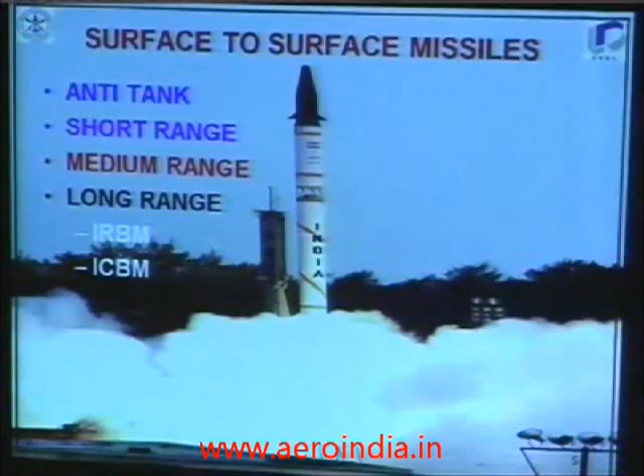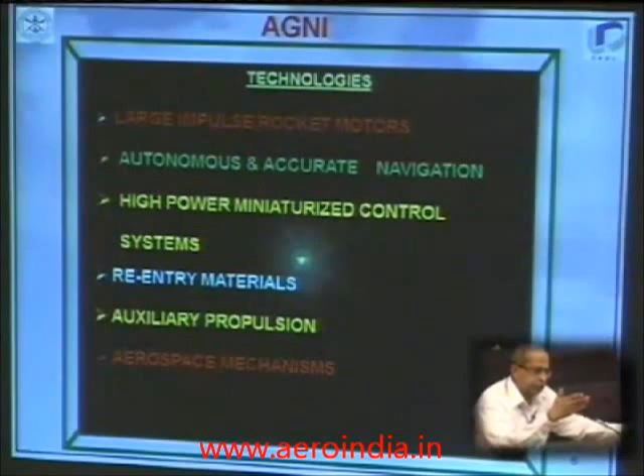Then you have the long range versions, the IRBMs, the ICBMs. I spent a little more time on this Agni missile, some of the strategic systems. The basic technologies and what it is you need to make: though all the missiles belong to the same family, each has its own very key signature in terms of technologies, materials, and avionics. If you look at Agni, you need very large impulse rocket motors, navigation, then very high-powered control systems, miniaturized, and most important, as he was mentioning earlier, supersonic cruise, supersonic combustion propulsion. The challenge today is the kind of materials you've got to have which will sustain that kind of temperature for so long.

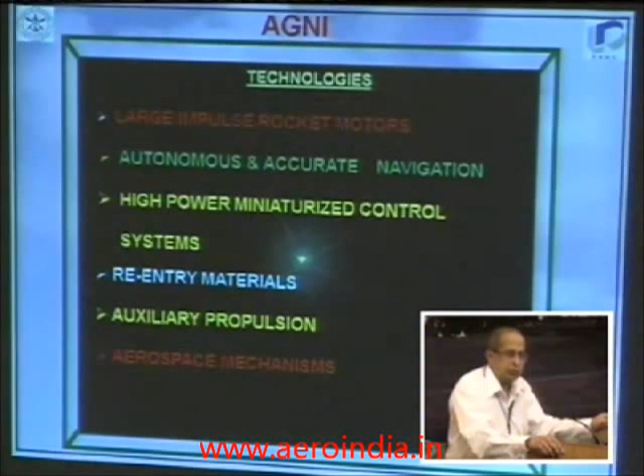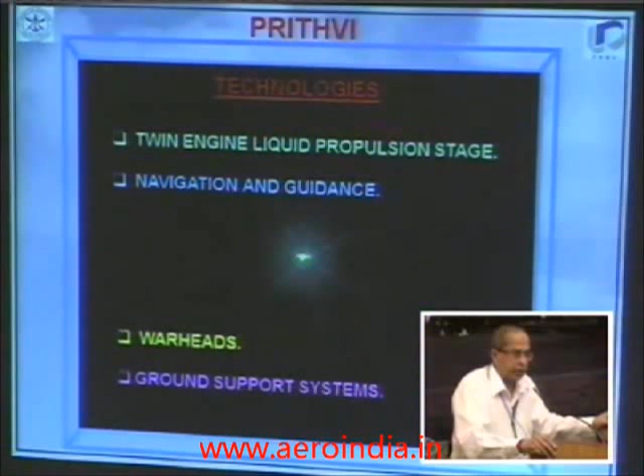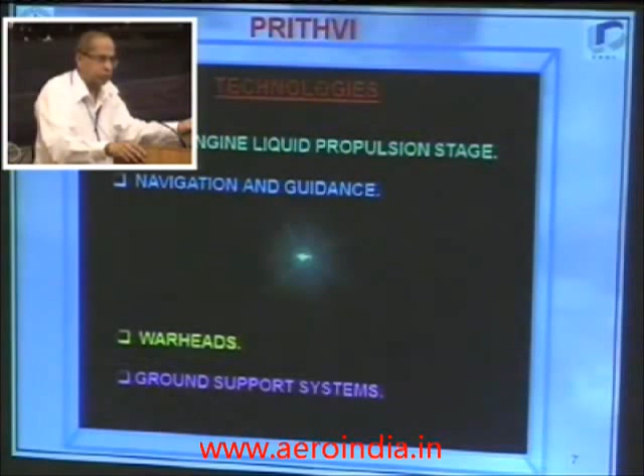And then you have auxiliary propulsion, thrust vectoring, and so on, reaction control systems, and then aerospace mechanisms, stage separation, and so on. I won't show a slide of this. You must have seen this several times earlier. Prithvi, of which General Sundaram himself has been a project director. It's based on a twin-engine liquid propulsion system, and then very accurate navigation and guidance, and the kind of warheads. And in today's deployment scenario, more than the missile, what's important is the ground support system. Making a missile is not all that tough, but making a weapon system with the ground system or the platforms today is a real challenge.

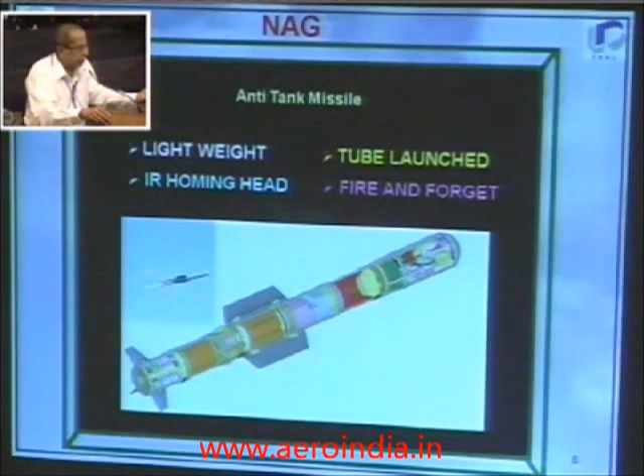Similarly, the anti-tank missile, Nag. A little while ago, if you were here, around 12 o'clock, my colleague Varaprasad was talking about the Nag on the helicopter, which is called the Helina. Lightweight, tube launched, and you have an infrared imaging seeker head and fire and forget capabilities. This is totally indigenously made and has been successfully tested. Let me see if I can show you a video of this.

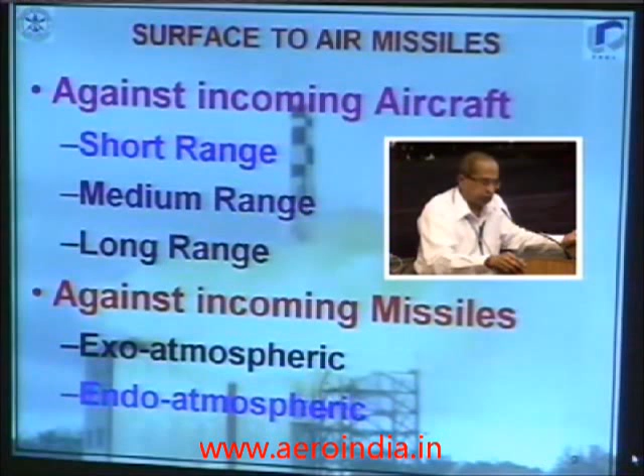And then coming to surface to air missiles. Mostly they are used against incoming fighter aircraft; they can be used against incoming missiles also. Broadly these days we call it air defense, both exo-atmospheric as well as endo-atmospheric, which our SA himself has been pushing very hard. This is one of the success stories of the indigenous program. This we have gone way ahead.

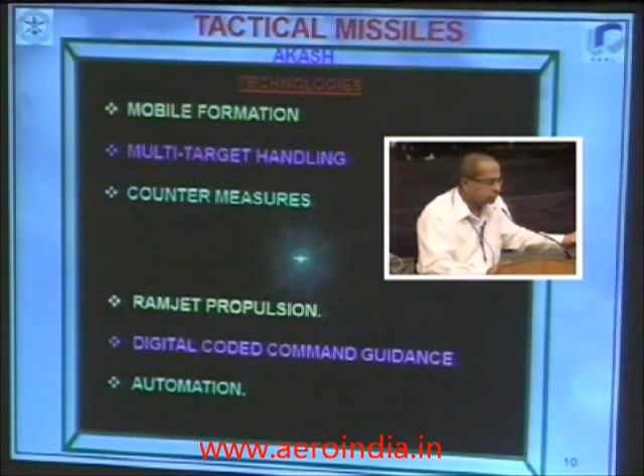Then comes Akash, which is now going into production, large numbers, thousands. And here the trick is mobile formation, the weaponization, and the ground control systems, multi-target handling as a missile, and state-of-the-art countermeasures. Another important area is the ramjet propulsion. That is where it has taken considerable time in integrating; it's actually an integrated ram rocket. And then you have digital coded command guidance. You have a ground-based radar that steers the missile towards the target. And then of course automation. These are the things. Just one or two animations. I thought I'll show you one video.

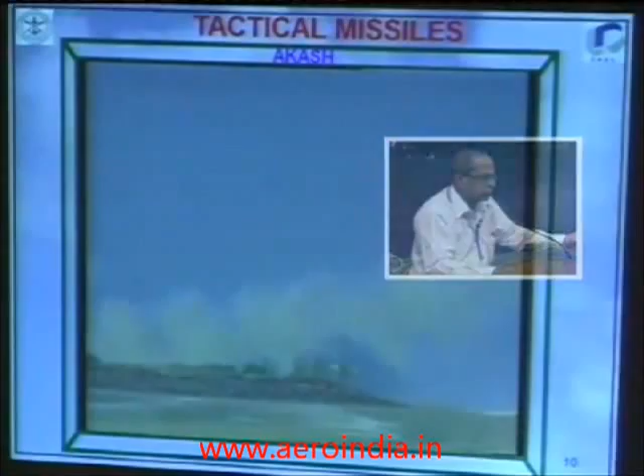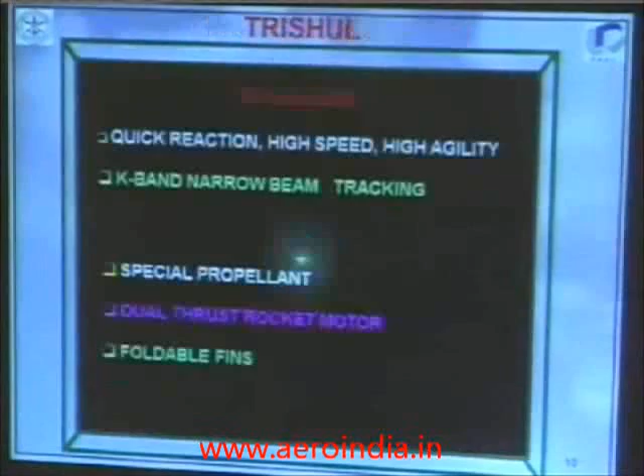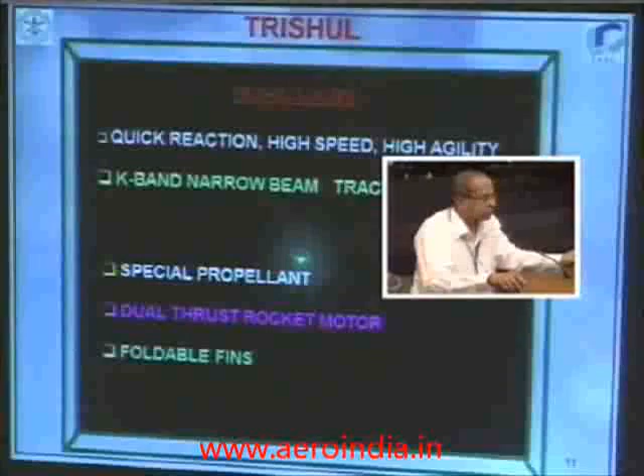It's a so-called QRM, quick reaction, high speed, high agility missile. And we have got a K-band narrow beam tracking system. And we have used a very special propellant in this and a dual thrust solid rocket motor. That is, you have the booster fired for some time and then you have the sustainer taking it along,

and then fins are foldable. So this is also a very important system which we developed, though it could not enter the production. This is air-to-air missile scenario, animation. All it needs to make this kind of system.

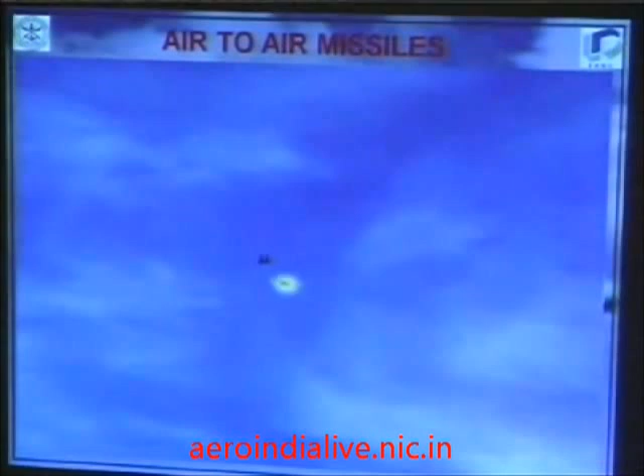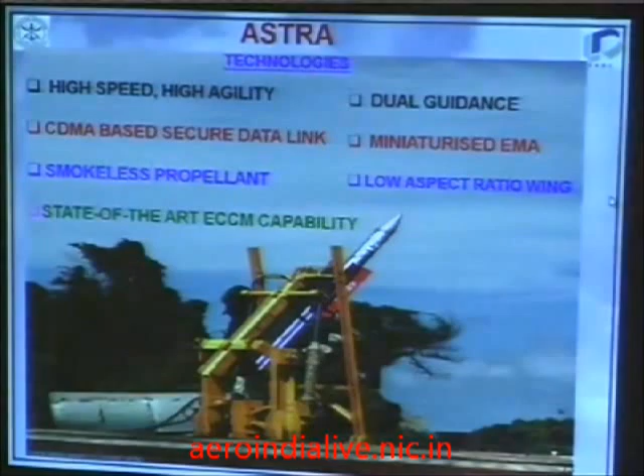To make this missile, what all you need is you need a very high speed, high agility system. Then you have got a secure data link. The mother aircraft radar looks at the target. The information is passed on to the missile through a secure data link.

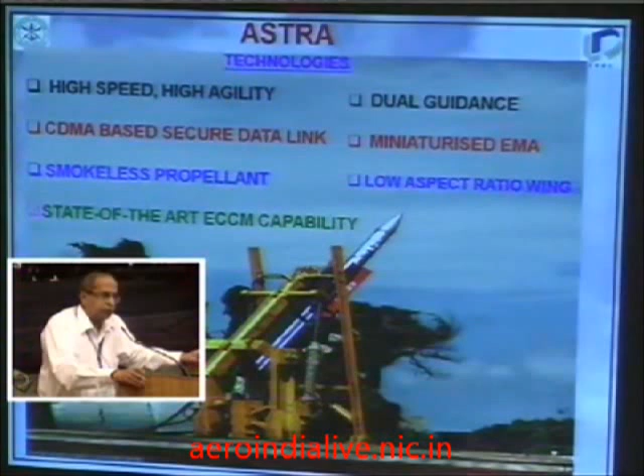Then you have dual mode guidance. That is, in the mid-course phase you have the inertial navigation. In the end phase you have got the terminal guidance using either an active radar today, of course, or using a dual mode radar. The name of the game today is all miniaturized systems. Even the electromechanical actuators which are used for moving the fins, they are all miniaturized. The wings are all low aspect ratio wings.

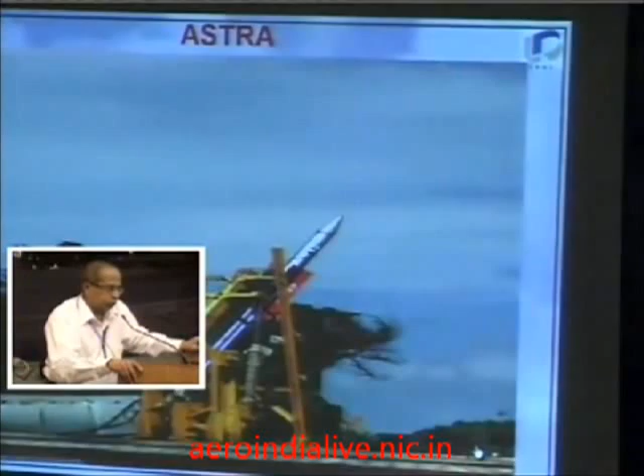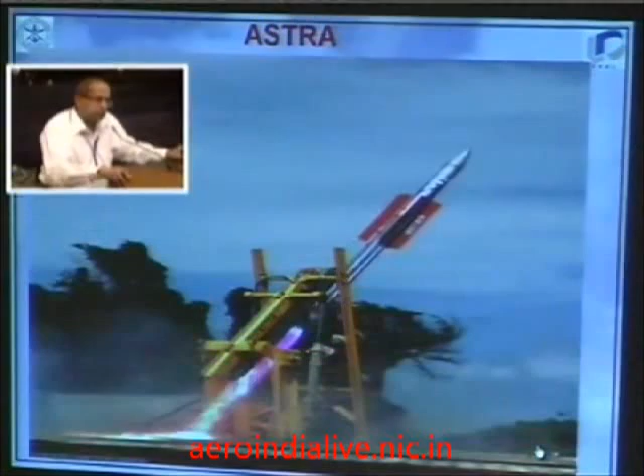So this is one of the flight trials, high speed movie camera we are showing you, just to show the kind of propulsion system which we have taken considerable time, because the Air Force asked for a smokeless propulsion system. Initially we had problems of combustion instability, so we had to do a lot of experiments, try with a lot of additives and other inert elements to make it totally smoke free.

Then you have, in the category of air to surface missiles, you have against ground targets, against ships. These are the kind of systems we are trying to work. Then you have underwater and ship-launched missiles. Currently programs are on in DRDO. We also are making submarine-launched systems, both against strategic targets as well as ships, plus systems launched from the ship, like Dhanush, for example, against strategic as well as air targets.

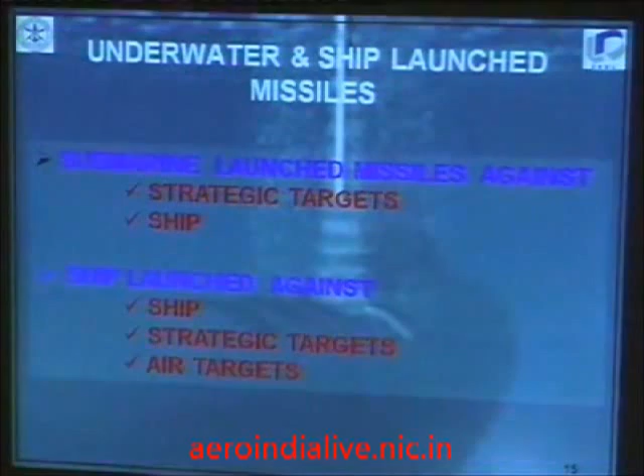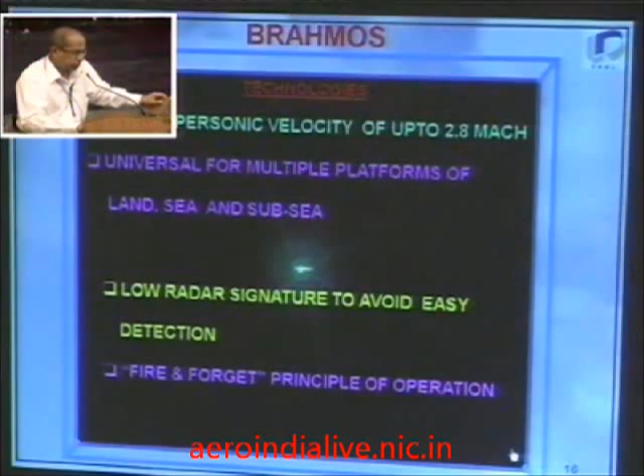Now, of course, a lot has been said and a lot has been seen about BrahMos. I will not spend too much time, except that I will show one video for those who have not seen. Supersonic cruise missile based on adapted technology using kerosene. Trajectory normal. It's a joint venture between India and Russia. It's a success story. Then you have the ship-launched version of same Prithvi variant.

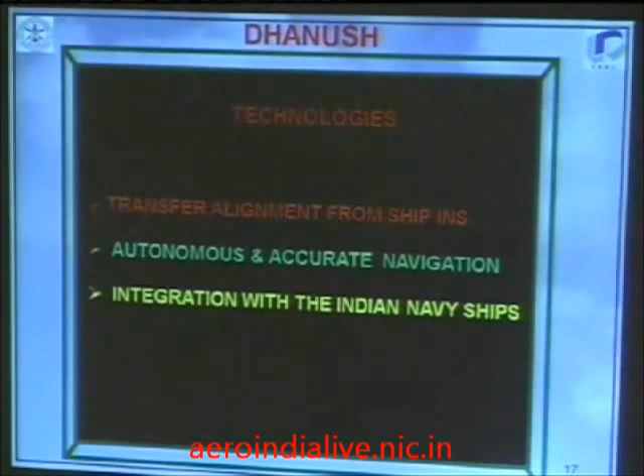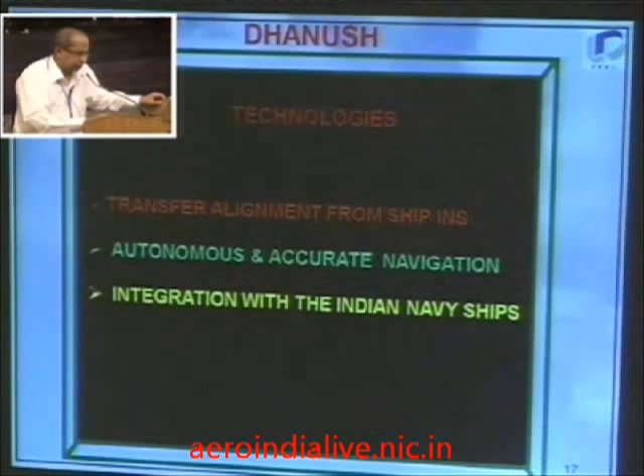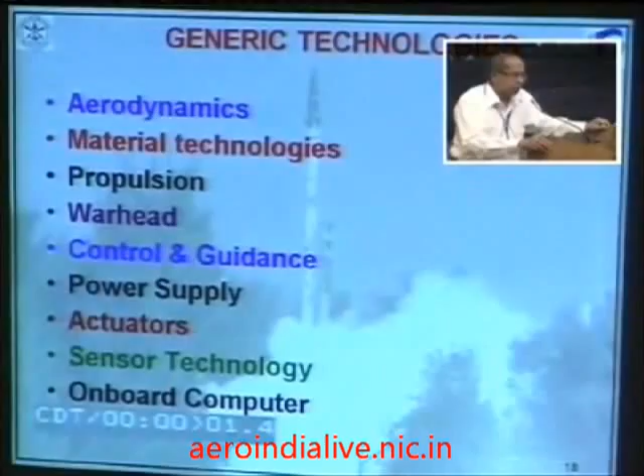Here the technology is accurate transfer alignment and then autonomous and accurate navigation and integration with several of Indian naval ships. Now I dwell some time on what are the kind of generic technologies you need to make this kind of weapons. One is aerodynamics. Today's aerodynamics, if you look at tactical missiles, it is quite different from what you read in the books, especially when you go down to very small missiles with low diameter, low moment of inertia.

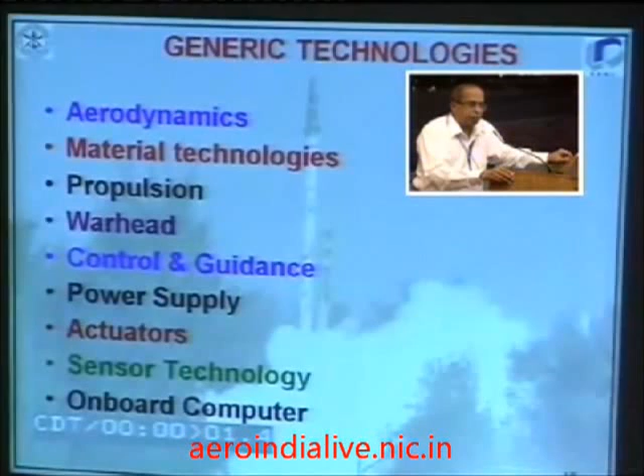It becomes a very highly complex aerodynamics, especially at high angles of attack. And the cross coupling between the pitch motion, the yaw motion, it's very difficult to figure out. You've got to do a lot of experimental work, CFD, flight testing, wind tunnel testing. And even then sometimes you find it extremely difficult to reconcile. And then material technologies, high specific strength. And then propulsion, of course you have got various propulsion systems today. We have ramjet, scramjet.

And then different types of warhead. I will not spend too much time on, there are so many varieties of warhead. It is target specific. And then control and guidance, the sensor, and the kind of accuracies you look for, whether you want to make a missile or eventually want to make a hittile. A hittile which has almost zero miss distance, we call it hittile, so that you can reduce your warhead requirements and increase the effectiveness. And then the thermal batteries, the lithium ion batteries, the varieties of batteries which we develop for power supplies.

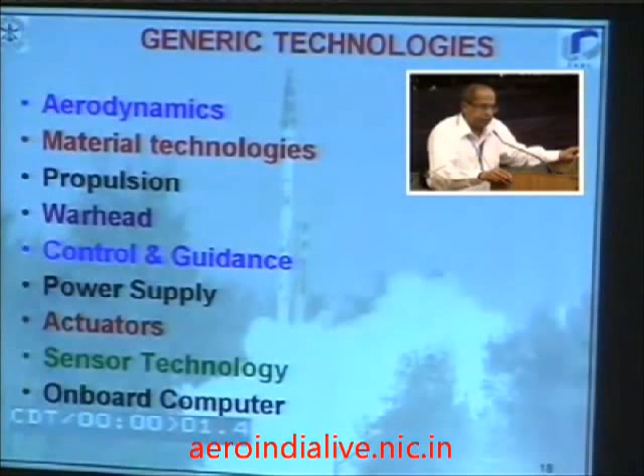So they are getting more and more miniaturized by the day. And the kind of energy density you get, V into I into T, it's amazingly large for its size and weight. And then of course actuators, they are also becoming smaller and smaller. We had earlier hydraulic, pneumatic, now you go down to electromechanical. Even these are becoming smaller by the day with new materials and powerful permanent magnets.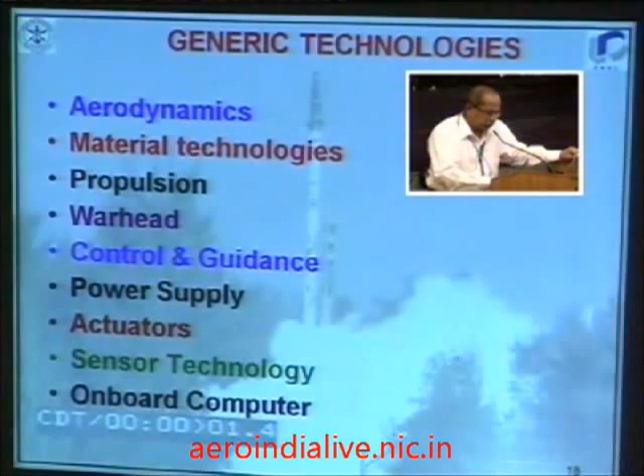That's our goal. These are all the generic technologies I have slightly modified from, as I said right in the beginning, the Fleeman book. There are so many iterations and so many lessons we have learned. So we have modified all these basic elements, the technology elements.

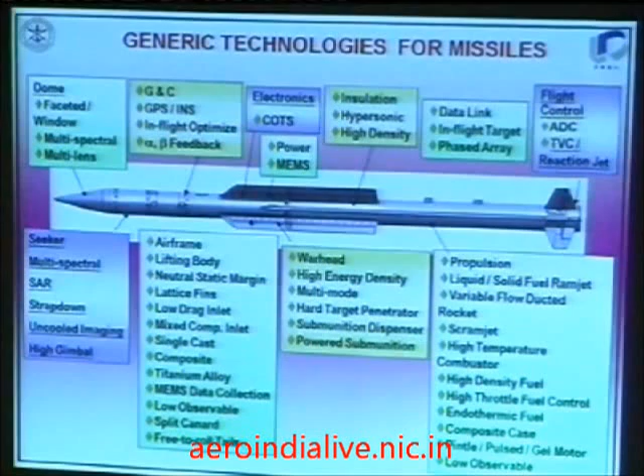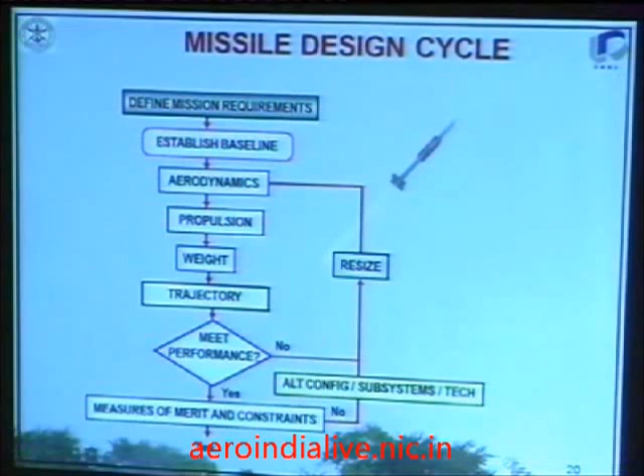Then this is the kind of design cycle we go through. From the ASR, we arrive at the mission, then we establish the baseline, then we look at the aerodynamics, propulsion, weight, trajectory. Then you find that somewhere something is not okay, then you change over. In our case, for example, when we put the actuators in the missile, we found that the length had to increase. The moment the length increased, to accommodate these actuators, a local diameter had to be increased. Then the drag increased, the propulsion was not adequate, the T minus D was not okay. So it goes into an iterative cycle by the time you freeze your design.

It takes considerable time. By the time you freeze that, someone will suddenly say, why don't you change over from aluminum alloy to titanium? This is much better. The moment you change to titanium, you have some other difficulties, and the rocket motor remains in maraging steel, other elements are in some other material. So you have got stress corrosion and dissimilar materials. All kinds of problems you get into. Then you have thermal problems, because these missiles go up to as high as Mach 5, Mach 5.5. So you have to take care of all these things.

So suddenly down the line, say after 4 or 5 years, you encounter new problems. That's how the cycle time sometimes becomes longer. But in the end, if we decide that we do not do too much experimentation, you get a product in a cycle time of something like 10 to 12 years.

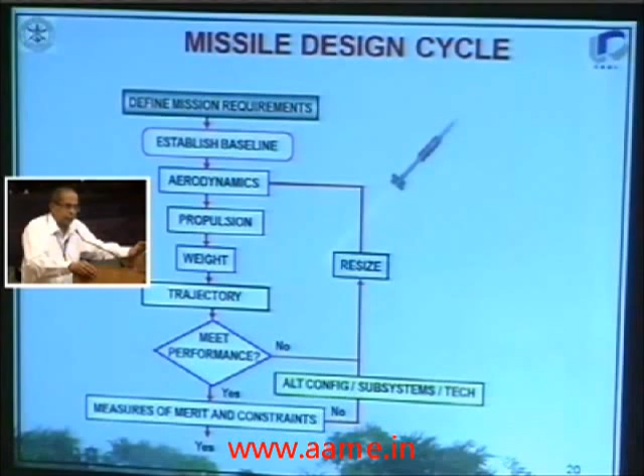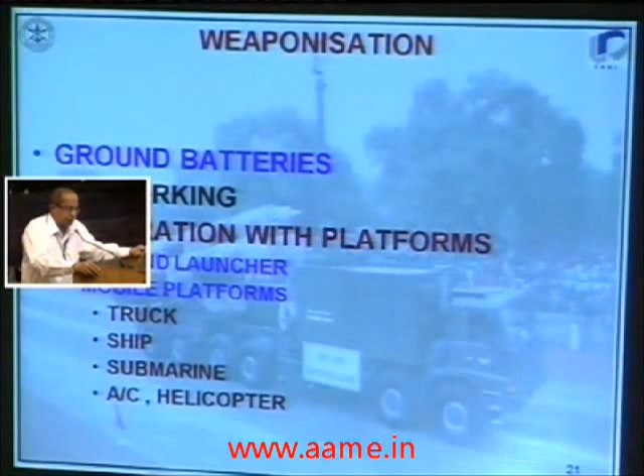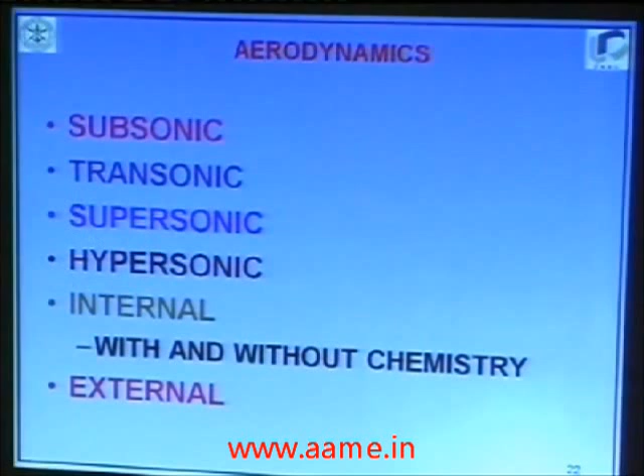Then I come to weaponization. Then you've got ground batteries, you've got networking. The most challenging job, as far as my experience goes, is integration with platforms; it is as tough, if not tougher, than making the missile itself. Integrating with trucks, ships, submarines, aircraft, and helicopters. Then you have issues at various speeds: subsonic, transonic, supersonic, hypersonic, exceeding Mach 5, 5.5. Then you have problems associated with flow, internal flows, chemistry, external flows.

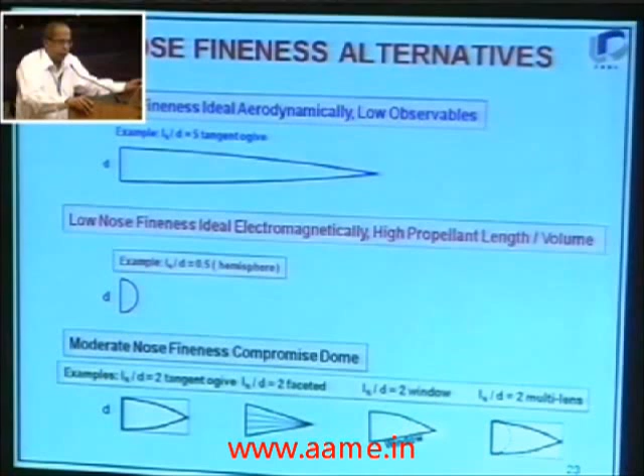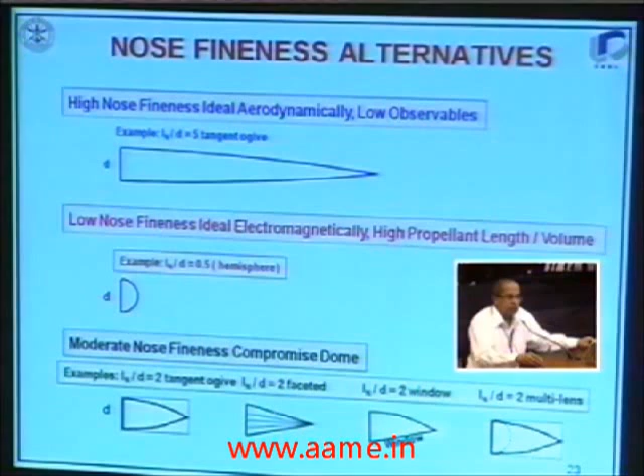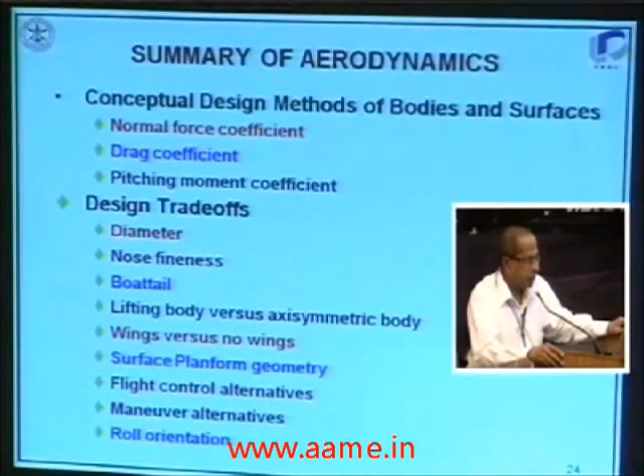And then what kind of shapes do you have to have? Today, for example, the slenderness ratio has touched almost 22, 23; even 24 is not unheard of. In earlier days, the moment you exceeded something like 16 or 18, people were worried about the interaction between aerodynamics and control, because there was flexibility. Today you've got powerful notch filters and autopilot design. So we do ground resonance tests and take care of all these. Still, there are limits which you should not exceed. Then you have very complicated approaches, design trade-offs. We take care of all these parameters which I'm showing on the screen.

Then issues like stability and control. These two are by and large contradictory. For example, if you take a missile and if you want to make it very highly agile, you don't want the static margin to move far too much. As you all know, with changing Mach number, the center of pressure keeps traveling. And after the propulsion has burnt out, the CG remains practically the same. So the kind of static margin travel we have creates stability problems.

So the static margin requirements you have at interception, the static margin requirements you need at the time of launch, taken from the safety of the aircraft, all these become a little contradictory. And at times it becomes very difficult to satisfy all the three. So we make trade-off studies and make sure that you decide which is of utmost importance.

Is it important at the time of interception, or do you want excessive stability and safety of the aircraft while you pay a price for agility? So these trade-off studies we make and take decisions. We keep the user in the picture and then take these decisions.

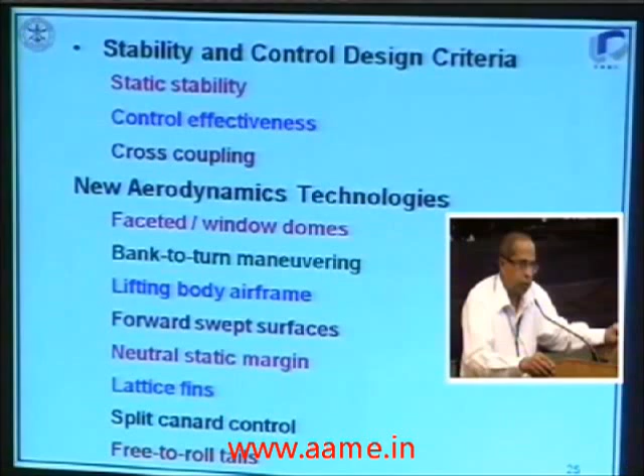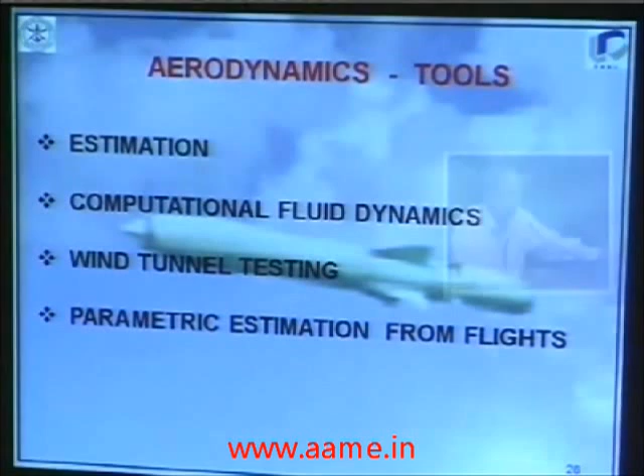Then for aerodynamics also, it's a little complex. At the time of design, you make some estimates, use tools like computational fluid dynamics, and then you would have wind tunnel testing. You always find some difference. And then when you start doing flight testing, probably you touch something like alphas exceeding 15 degrees or 20 degrees, and interception Mach numbers something like 1.4, 1.6, 1.8, or even bordering 2.

For this, you don't have corresponding reliable data coming either from wind tunnel testing or estimates. And often you find that even between CFD and the wind tunnels, as you all know, there's a lot of variance. Then we fall back on the parametric estimates which we do from the flight tests. And then over a period of time, something like 10 or 12 flight trials, only then do you have some reliable aerodynamic data, which is again used for the final design of your configuration.

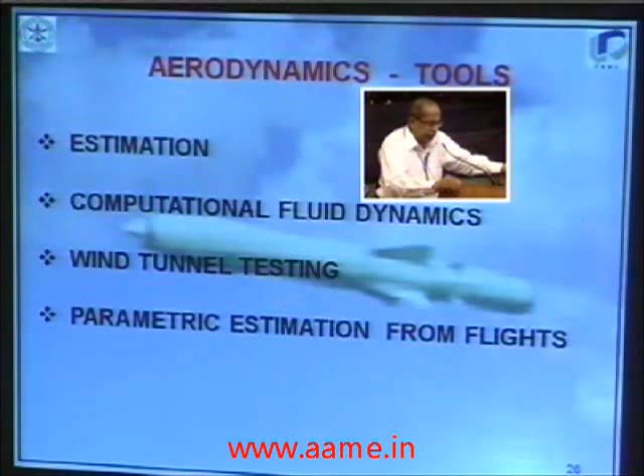Again, when it comes to wind tunnel testing, you have got serious limitations. The type of test sections you can afford to have, the bigger the better, of course. The bigger the costlier also. It goes on like that, Mach numbers, interference. So finally we fall back on parametric estimates. You do limited wind tunnel testing, depend largely on your CFD, take data from the parametric estimates, and finally make a nonlinear estimating model.

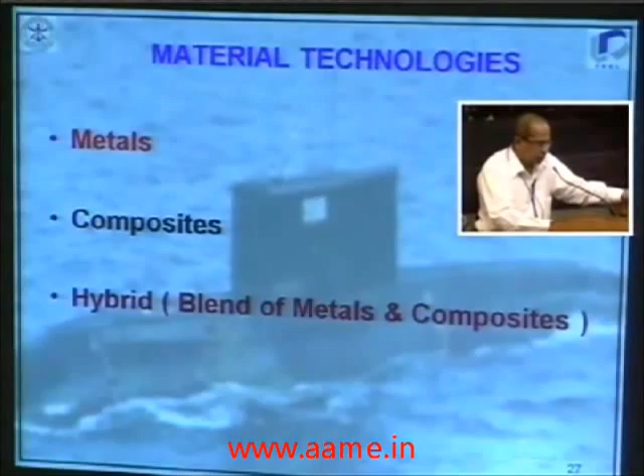Then of course materials. In the fast changing scenario of materials, you have got composites, you have got metals, you have got a combination of both, from structure considerations, strength considerations, thermal considerations, and more important is availability. And cost, of course. Availability, storage, strength, cost, all taken together, you can always work out a table.

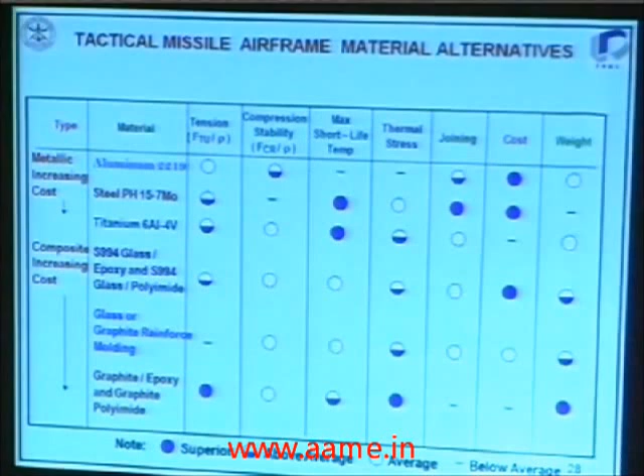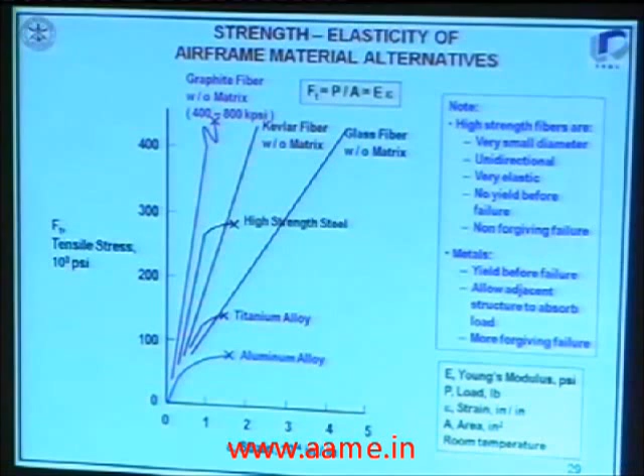We very judiciously choose the material, but spend a lot of time when it comes to testing to meet the requirements of airworthiness. That's a very tall order. And in my program, we have spent a good deal of time in testing alone, all these kinds of steels, aluminum materials, composites, etc.

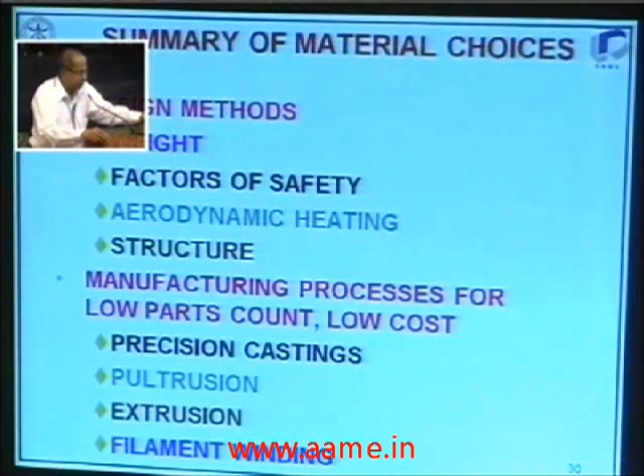Then comes material choices. You have got factors of safety, weight penalties, cost, availability, testing, aerodynamic heating, structure. So all these taken together, by the time you evolve something and start flight testing, the next day you get a new material option available to you.

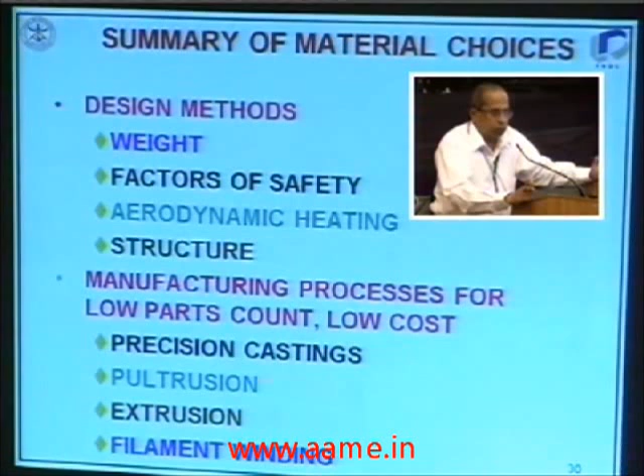But then, if you look at your schedules and costs, somewhere you've got to draw the line and say, well, look, Mark 1 or version 1, this is the kind of performance I can give. In the next version or the next derivative, with better materials, we can give superior performance.

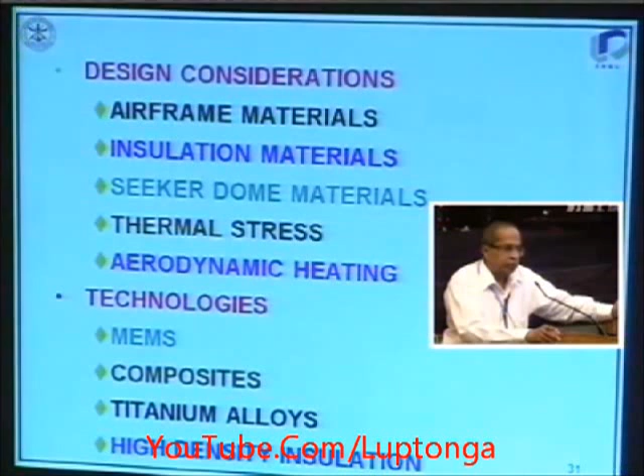Then while you do the design, it becomes a very complex affair if you get into new materials, especially for insulation. Like for rocket motor internal insulation, you have got ablative materials, epoxy materials, EPDM materials which are required for low temperature applications, and then various technology options, MEMS, composites, titanium alloys. All these play a very vital role from the technology level, design level, product level, flight testing, and finally weaponization and handing over to the user. Of course, these are all the propulsion options you consider at the beginning.

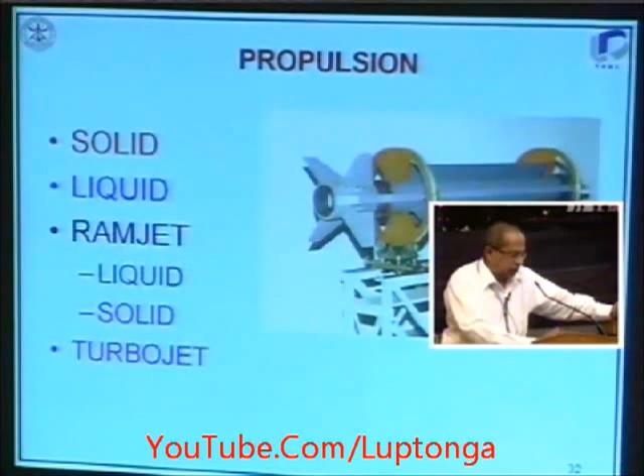Another 5 minutes, please. Okay.

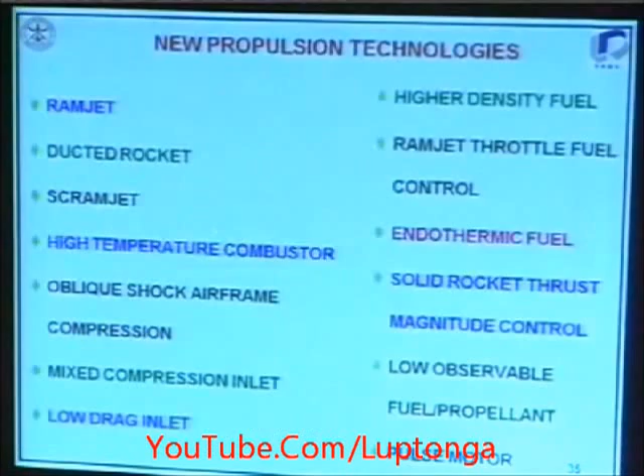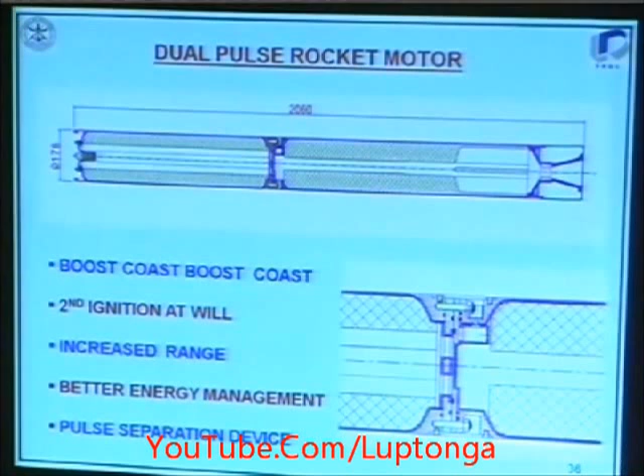Then I'll skip some of these. These are kind of dual pulse rocket motor which we have built for our longer version of Astra, which can go up to 100 kilometers plus. It's a dual pulse rocket motor. You fire the first pulse, do the coasting for a while, and then fire the second pulse depending on the kind of scenario, engagement scenario you have.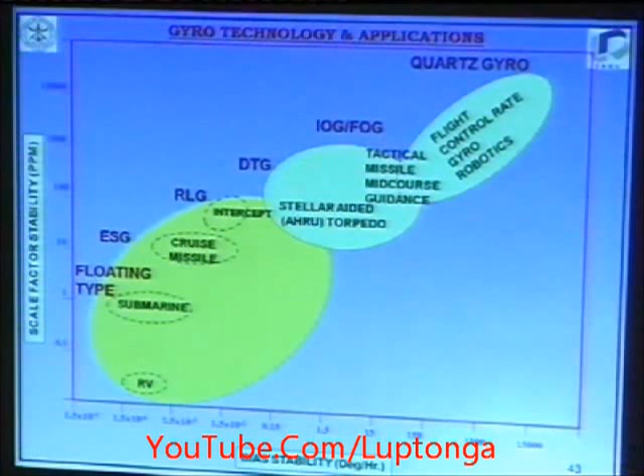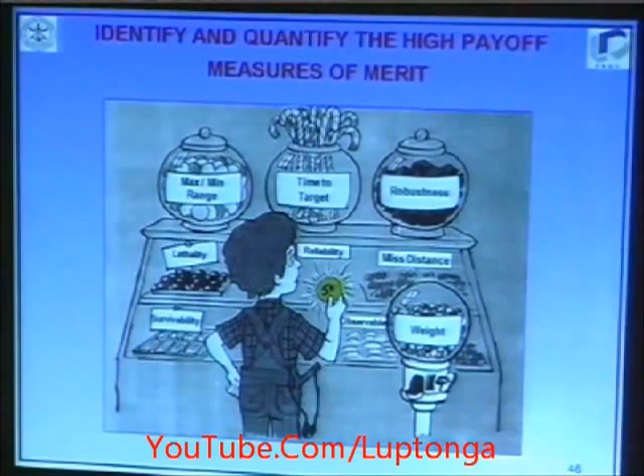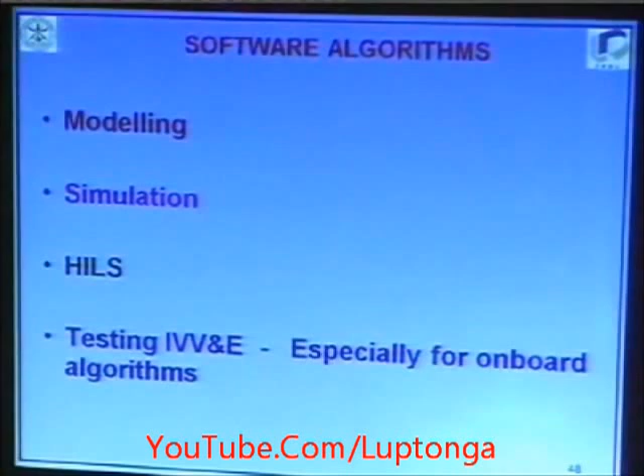And this is how the sensor growth has been over the period of time, starting from going up to fiber optic, quartz gyros, seeker heads, active. Today you have RF, you have got dual mode, onboard computers. Then you make all the trade-offs. And then coming to checkout systems, you have got ground checkout, cockpit display, and then checkout systems for the tank as well. And then various softwares, and then software verifications, modeling, simulation. And we do very exhaustive hardware-in-loop simulation, HILS, and even the software is also thoroughly checked, IV and V.

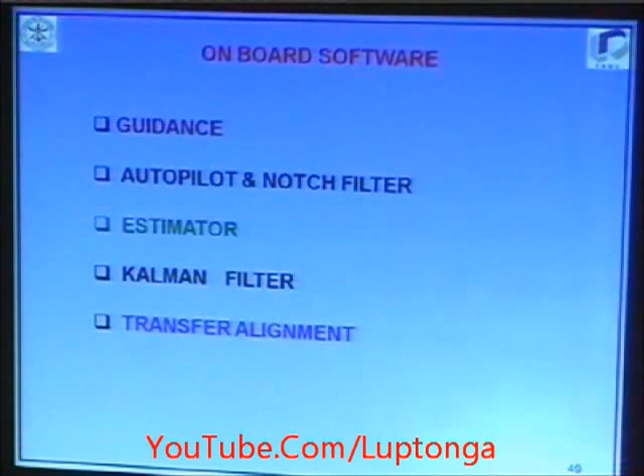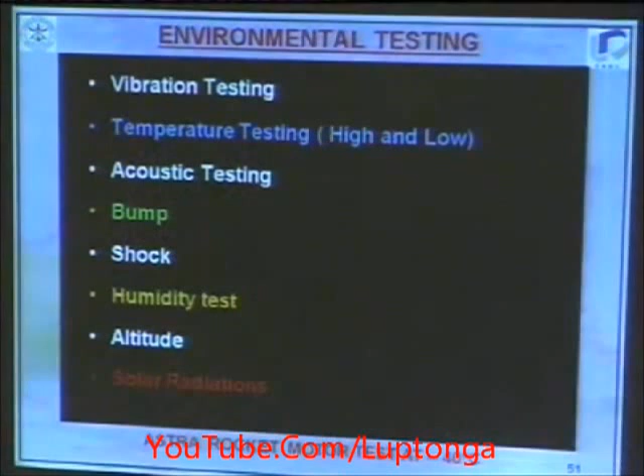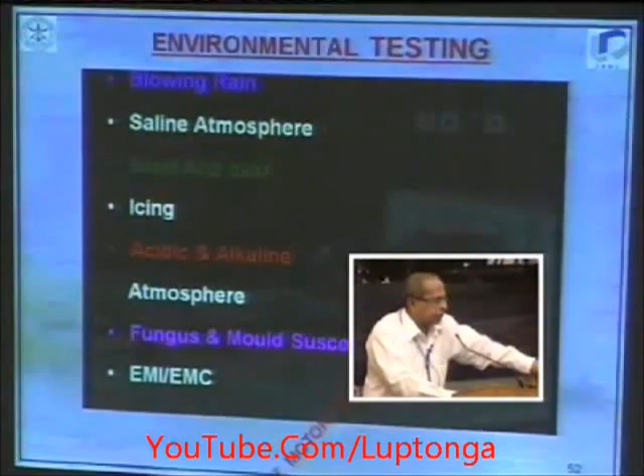And then onboard software, guidance, autopilot, the filter, especially for notching the flex effects, the estimators, the Kalman filters, the transfer alignment between the master INS and the missile INS, and then the integration techniques. Then comes the very time-consuming but absolutely essential part of the development, the environmental testing of all these schemes. Then still continues. Then design validation, technology development.

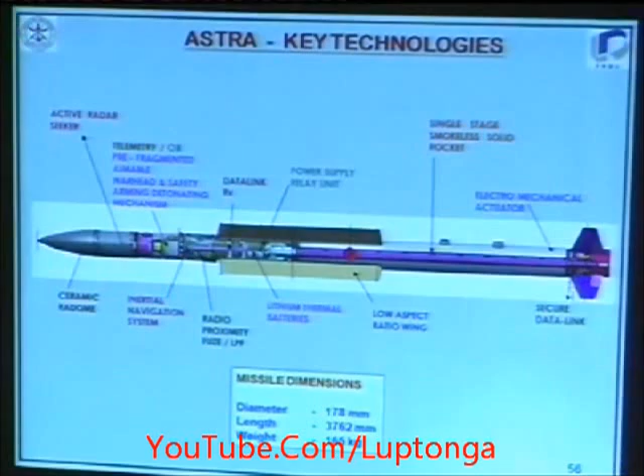To conclude, I will just show you the kind of technologies which we have developed for our beyond visual range, and then the captive flights which we have done on the Su-30. We have put 4 missiles, 4 Astra missiles, Su-30. There were a different number of sorties done, starting from low speeds to high speeds, and including steep dive down, to ensure that you have adequate aeromechanical compatibility between the missile. With this video, I conclude. There is a chase aircraft following our Su-30, carrying the camera. All this was done by our ASTE pilots.

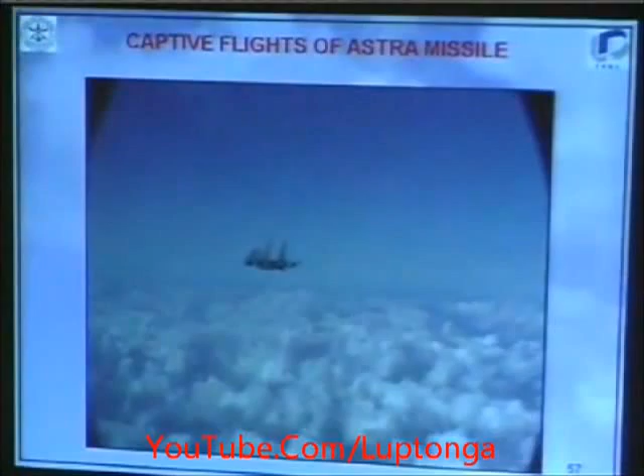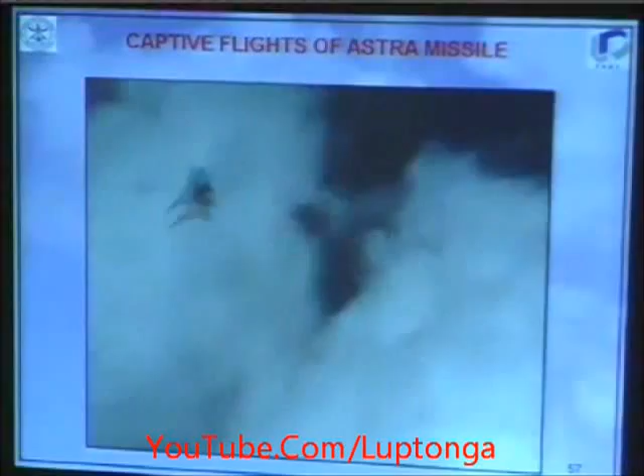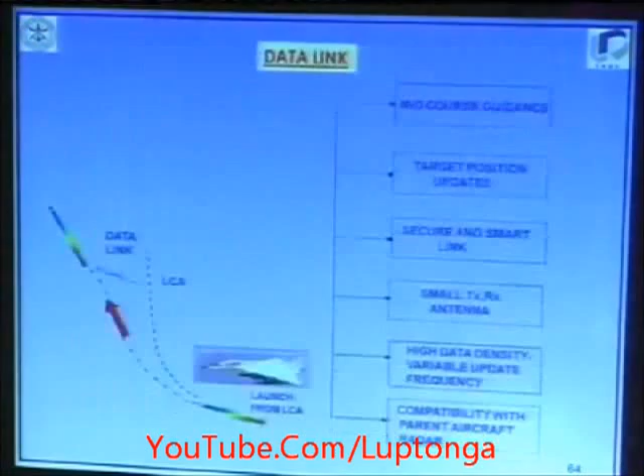Dive down is there. So we try to measure various corner points of the flight below the Su-30, the kind of vibration, the kind of stresses, and the temperatures the missile, the launcher, they experience. You will see the steep dive down, going up to 1,450 kilometers per hour speed IAS. I'll skip all this, but I just wanted to show you one. Of course, there are all the various work centers, CEMILAC, DRDL, Air Force, so on and so forth.

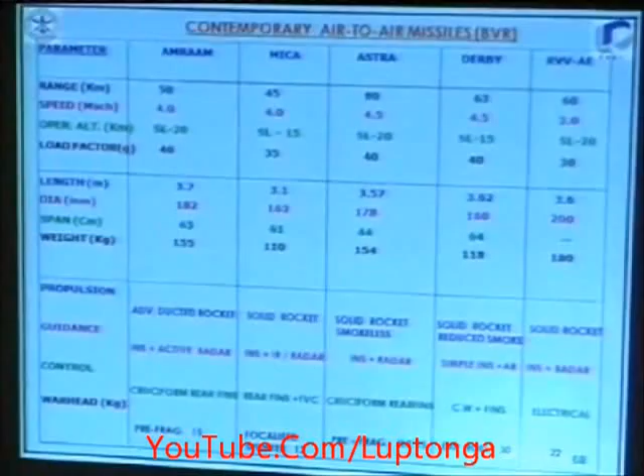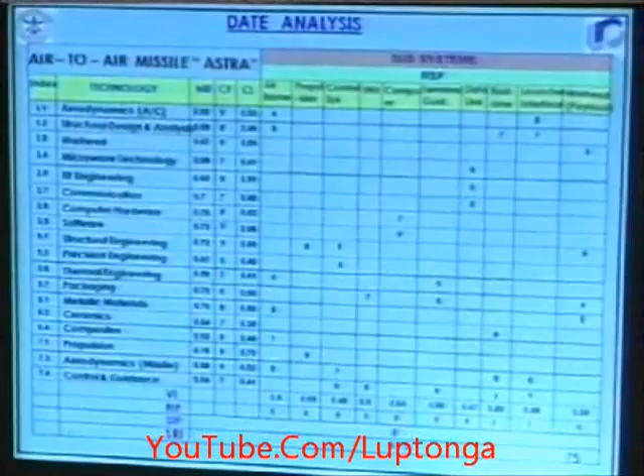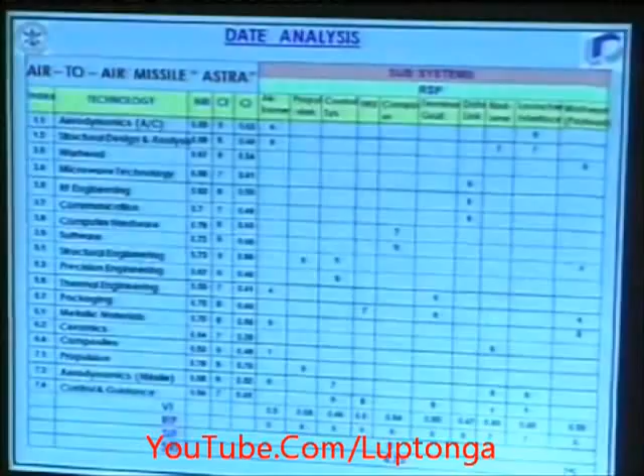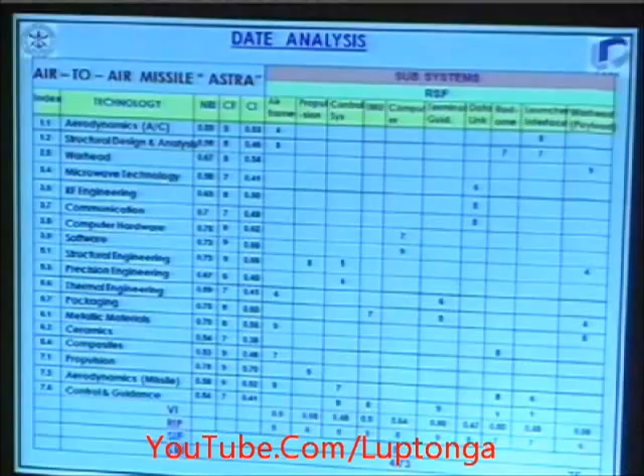The moment you make a project proposal, we analyze on the vertical axis various technologies, on the horizontal axis various subsystems, and look at the National Resource Index, and finally arrive at a figure called SRI, System Realizability Index. So in a scale of 0 to 10, if you are somewhere above 3.54, that means it has got a fair chance of success over a period of time. So this doesn't stop the sanction of a project, but it will only guide people sitting in Delhi to tell you whether the project is a doable project or not a doable project.